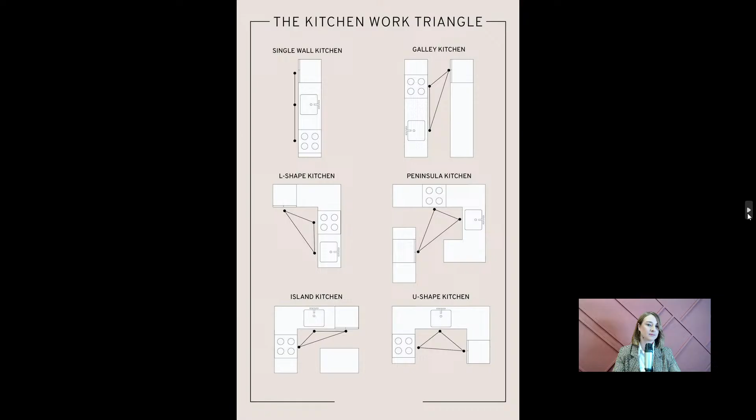Blueprints give you exact measurements and a clear guideline, ensuring that proportions are correct so everything fits perfectly. Layouts are functional, making the space easy and comfortable to use. Your model is true to life and ready to impress clients. So having a blueprint helps you make it like real life. You don't have to guess and try to fit another kitchen in your space, which might not work for your project. So starting with a blueprint is my first recommendation when we talk about kitchens.

When we work in 3ds Max, the blueprint becomes a guide. It ensures we model with accuracy and efficiency. By following a blueprint, you can focus on creative aspects, like choosing materials and lighting, and not worry about whether the basics are good, whether the functionality will work in this project. So that's why today we are starting with a blueprint. I'll show you how to use it to model a stunning, functional, modern kitchen step by step. By the end, you'll see how this simple document can lead to a professional, photorealistic result. Ready? Now let's make some magic happen.

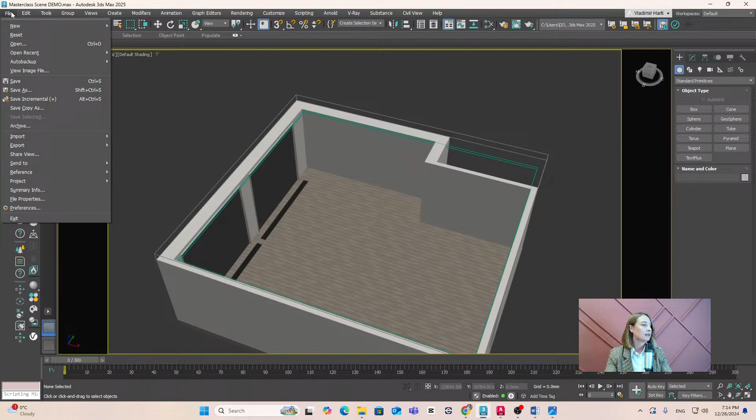For importing an external file, we access the File menu, go to Import, and I will use my prepared DWG file, the blueprint. Go ahead with Open. Here we have some importing options, which are really important. First of all, I make sure I have checked the Rescale option and that the incoming file units fit my units in 3ds Max, so the scale will be 1:1, exactly the same as in real life.

Another thing I pay attention to here is importing the blueprints as one object. I don't need different parts of the blueprint staying apart; I just need this object as a reference, so I will import it as one object. Then I go ahead with the OK button, and I get the same blueprint right here in 3ds Max.

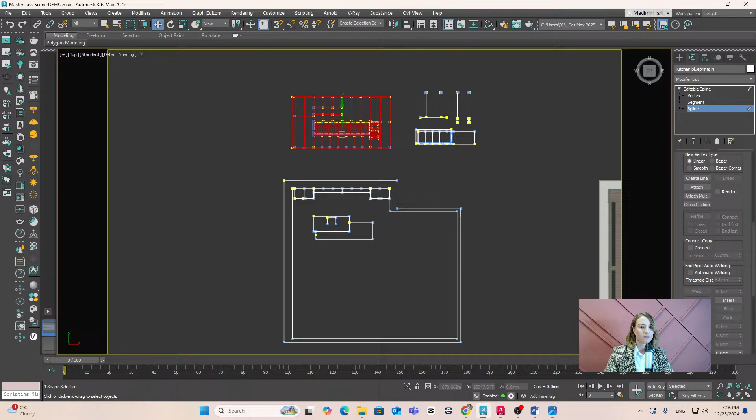You can see it here, but to make sure I have the whole layout I need for the kitchen and the reference blueprints are right in place, I will convert this line to an editable spline and separate the floor plan from each of the frontal views. Working in spline mode, I will select each frontal view separately and detach it to have them separate. Okay, the same with the second one.

Okay, so what I'll do next, I will rotate these two frontal views in vertical position. What will make these blueprints placed vertically right close to my plan. In this way, using a rotate tool, I will rotate it on 90 degrees. To make sure I'm working accurately, I will use angle snap toggle.

Also, because the pivot point was in the center of the entire drawing, I would prefer to center it to this drawing. To make this, I will use hierarchy panel, affect pivot only, and center to object. It will make it easier to control this drawing. So I will rotate it on 90 degrees. The same with the second one.

And what I'll do next, I will move them to fit my plan. Right here. This one is related to island, so I will use it as well. Pay attention that I'm using snaps. Snaps are helping me a lot organizing objects and aligning them to each other so they do not intersect or

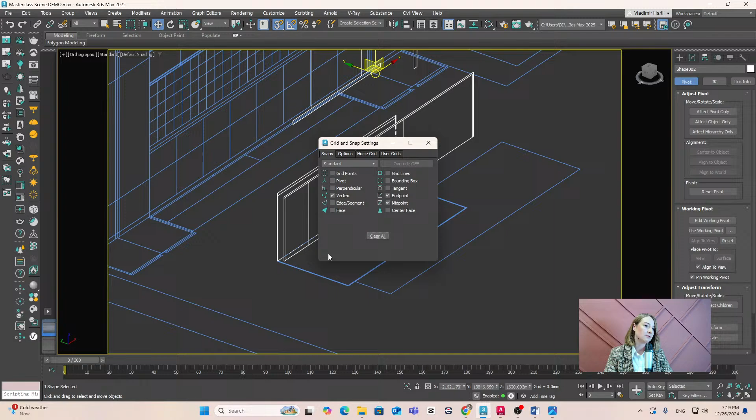they are perfectly aligned. So if you want to see what snaps I'm using, I have almost all the time vertex, endpoint, and midpoint, and others I'm checking just in case when I need them. And one more option, I have checked enable axis constraint, which makes me constrain the movement of objects on certain axes, which makes it work much easier and aligning it perfectly.

So I will constrain it on z-axis now and make sure that this is aligned perfectly on the floor plan. So what I've got now are these drawings aligned this way, which now I will move right to my space. Okay. So here we go. You can see it in here. Yep. I think we are good now.

One more thing I'm trying to do usually is to organize objects on certain layers. So I'm using Layer Explorer. I have already some layers in here, as I've prepared the appliances, some decor, furniture, and lighting options that I will unhide when our kitchen will be ready. So I will make sure that I'm working on a separate layer, or maybe in this case I can use the default one where I have the cameras and I have now the blueprint.

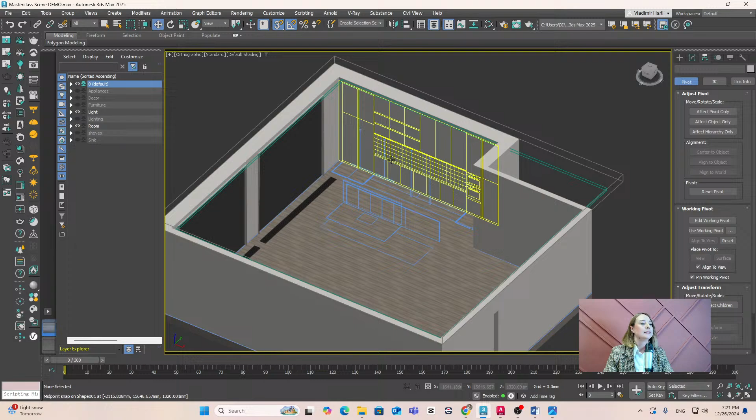So we'll come back to the layers a little bit later, as it is important to have all the objects organized logically in our scene. So next I will select the blueprint. Okay. Isolate them using isolate selection. The hotkeys are Alt plus Q in case you need them.

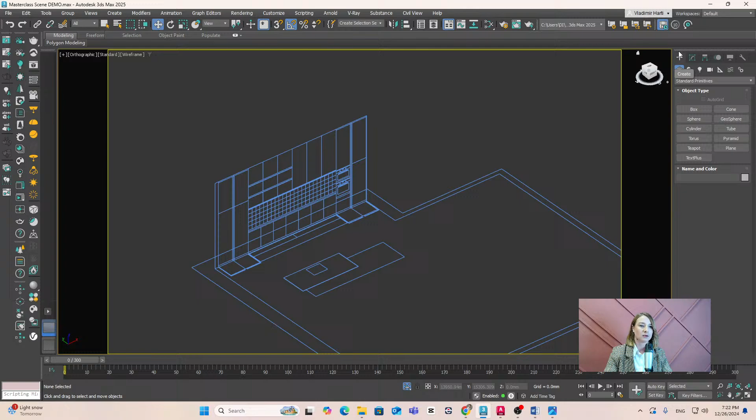Maybe I will keep for now just the back part of the kitchen and the floor plan. I will come back to islands a little bit later. So I will have just these two. And now let's start modeling. Let's see how we can create really quickly and accurately this kitchen. So I will start by working with box as a geometry.

So what I will do first, I will create the cabinets, the lower cabinets of this kitchen from the middle, and I will start by using snap mode over the drawing, which will help me get the exact position of this box and to align it as well. Okay, here we go. Next, I will convert it to editable poly.

So I'm trying usually to focus more on what we really see in the visualizations. So I'm not working too much in the interior of the kitchen, so I will not make all the shelves or all the stuff inside, behind the fronts, but instead I will be working more detailed on what we see in the front and making the details more realistic where they are visible. This makes the scene not that complex, easier to work, and in this way we can try to make it work better.

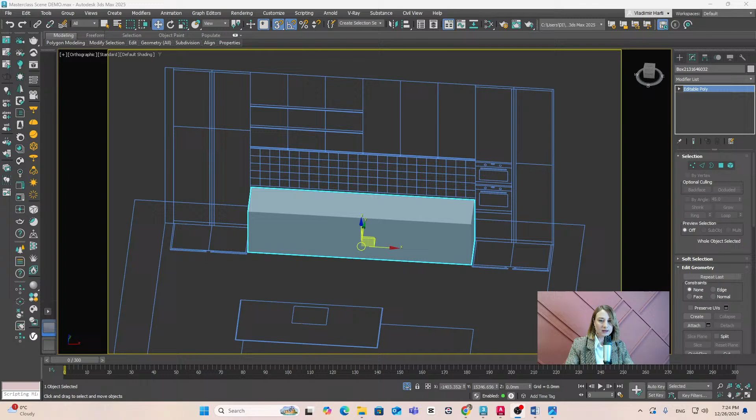Okay, next, after I've converted it to editable poly, I will make a few changes, and first will be this part. I will move it a little bit inside, as usually in the bottom of the kitchen cabinet we have that part that is a little bit behind, which makes it comfortable to place our feet behind.

So I will move it on a certain distance, so I will use right click on move button, and in relative coordinates I will give the distance I need on the y-axis. So in my case it will be about 50 millimeters. Okay. I will come back to that. Now I will go on with the next box that will fit right in here. It will be the part that will be a little bit coming in front.

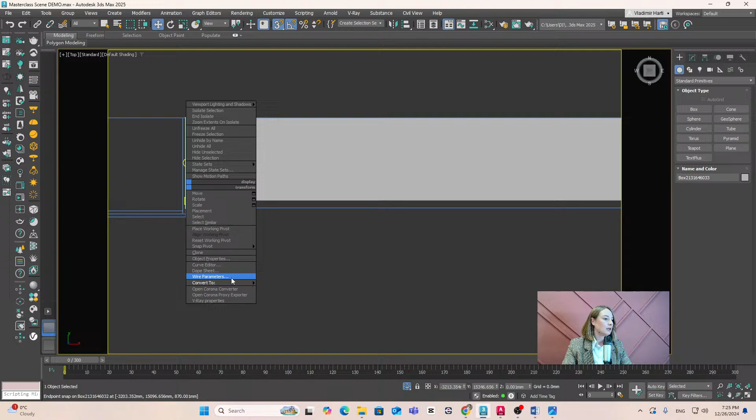This will help us see the construction, the main elements of the kitchen. So converting it to editable poly. If I want to have it in the same editable poly, I can just activate element mode and copy it on the other end. So I will use Ctrl plus Shift and drag on the needed axis, which will make me a copy of this element. Okay, just placing it in the right place.

Okay, next I will move on to front view, where I have the front I need in here. So in this case, for quick modeling the front, I will use a plane and I will make it fit right in here and add the number of segments I need to fit exactly with my blueprint. So let me move it in front to show you what I've got in here. So here you go. And now I think I have here some special actions that will help you save a lot of time while creating fronts in 3ds Max.

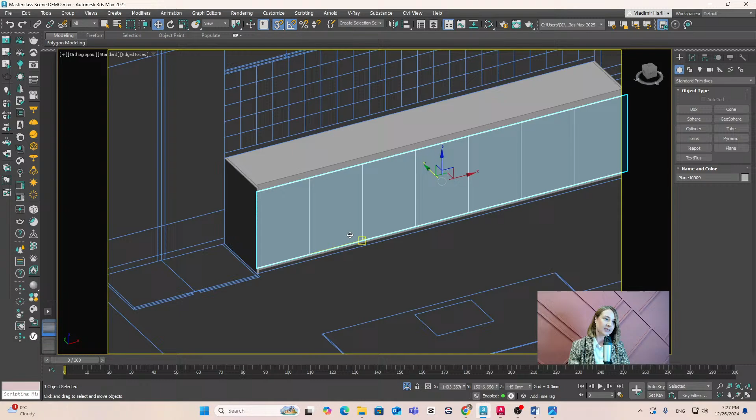So what I will do in here, I will convert this plane to editable poly. I will select all the polygons inside editable poly. Ctrl A helps you select all of them. And you know that fronts usually look more realistic when you have the rounded edges, when you have the needed gapping between them. So what we'll do now, we'll add that specific gapping around each front, so it will look great and we'll get it really fast.

So what we'll use here will be inset. I will use settings to make sure it will work good for me. So inset settings. I will use the amount I need for gapping. It will be about 2 millimeters on each side. And as we have multiple polygons now selected, we'll get these 2 millimeters around the entire selection. What we need in this case is using by polygon and getting the same gapping, the same inset for each polygon I have selected. I will check OK to place it with these settings.

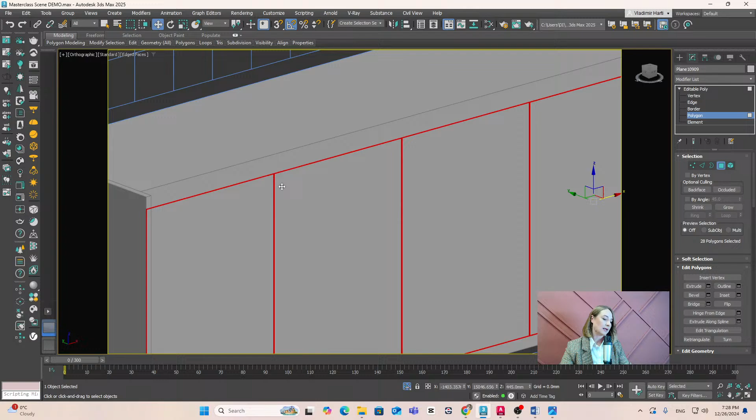And now what I need is just to inverse selection using Ctrl plus I and delete these polygons, which will make the needed gapping available now on our front. Of course, we won't leave these fronts so thin. We need to add some thickness to these polygons. A faster way to do it is using the shell modifier, and to control whether we want to add this thickness inside or outside. In my case, it will be outer amount. I will make it 20. Here, make sure you have auto smooth edge unchecked and straighten corners as well.

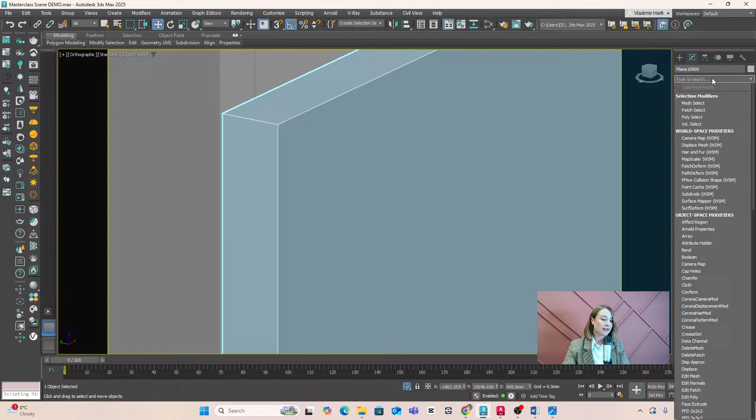And for getting nicer edges, which should be somehow rounded, as we never have fronts with sharp edges, I will convert it again to editable poly and apply one more modifier, which is called chamfer. I don't know if you ever used this, but I think it's a genius modifier. It applies a faster result. So I will just go ahead and change the amount, the radius I need for the edges. It will apply to all simultaneously. So I will use a 1 millimeter radius. I will make 3 segments in here.

And one more thing I set up in here is smoothness. I don't like having smoothness on the entire polygon, which gives some unwanted shadows, so I use smooth chamfer only. Change this and it will have a big impact. Okay, here we are with the front. Now we need to do something with this space and add the handle.

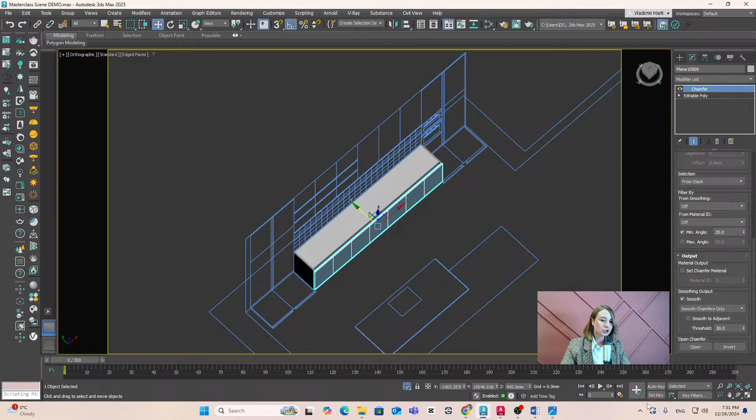I think I will add a hidden handle for the entire length of this cabinet. I will show you an example of what I'm thinking about. It will be an L-shaped handle, which will be right behind the front, which will make it look much better. So in this case, I will be using a simple line from top view, and to make sure I'm drawing a straight line that has no deviation in the Z direction, I will use snapping in 2.5 mode, which allows me to use snaps wherever I need, but will keep my drawing planar. It will be just in 2 directions, x and y. So I will draw this line in here.

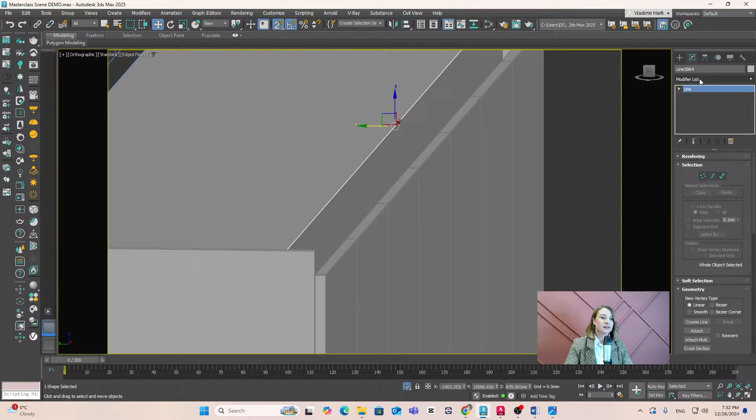Next, I will move this line somewhere above, I think over here, and you can see it in here. Let me show you. So this is my line, and next I will use another modifier called sweep. I'm curious if you ever used sweep and in which cases you have used it. So I will have the sweep modifier, and we'll have to do some changes in here. First of all, I use the angle built-in section. Next, I will control the length, the thickness and the width. So for the length, I will use about 60 millimeters. I will check later if it's good or not.

To make sure all this profile is aligned on down and on left, I will use the pivot alignment and choose the right position I need for this profile. So I will use the left top corner, which will completely move my shape into the right position.

Next, I have to make sure I have the needed length. Maybe I'll make it not that deep, move it a bit forward. I'll use about 20 millimeters here, and the thickness will be about 6. Okay, then I'll do it 30, to make sure I have enough space for the fingers when we try to open the door.

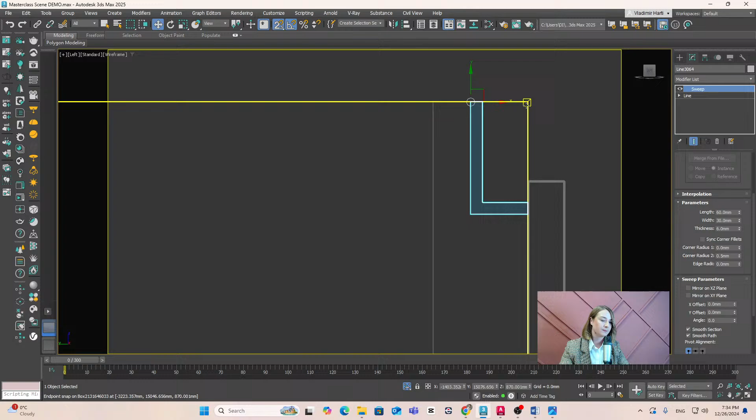So what we've got here is an L-type profile right behind the front, all across the cabinet. Next, I will add some refinements, adding the corner radius, maybe 3 millimeters, something in here, and a bit of edge radius.

Here is the front and here is the handle. Now I'll come back to my box, the main cabinet behind the front, and we'll make some changes to fit it over the handle and up to the cabinet.

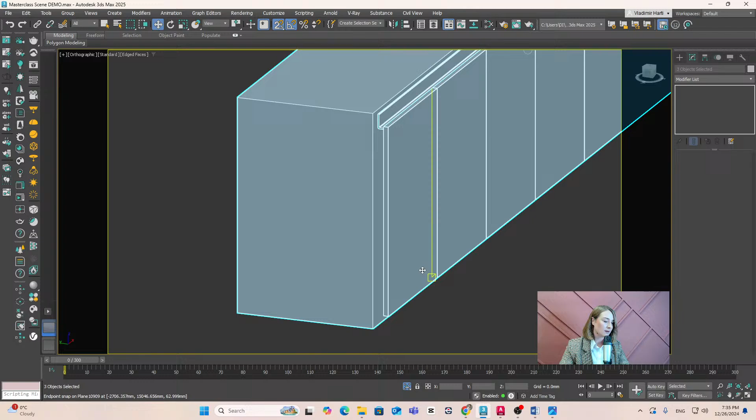I will select these three elements to make sure you see it clearly, so I will isolate them. This box is already converted to editable poly. I will add some SwiftLoops - you can find it in the ribbon, modeling, edit, SwiftLoop - and add some edges, which will let me control better what I need, making sure these are perfectly aligned with the cabinets.

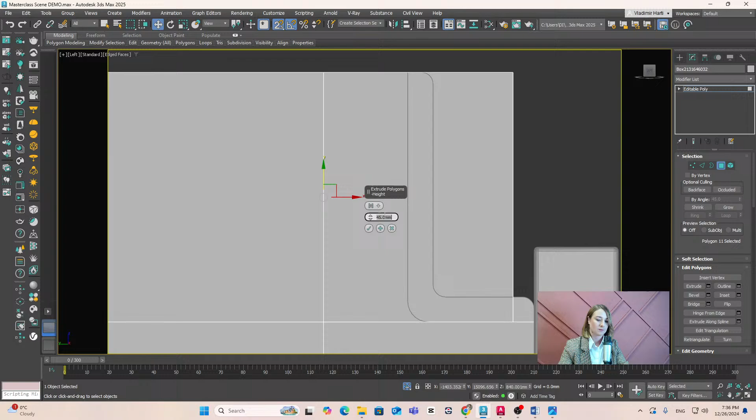What I'll do next is extrude this polygon. Let's see, I think we are good. And this one too. Oh, this one, and once again for this one. But this time a little bit, not that much - it will be about 20. Okay, that's good.

I will have to select again all my objects to isolate them in order to continue working with my kitchen. So now I will attach all the back side of the cabinets into one object. For that I will select any of them, use attach, and add the other one.

As we know all the elements should look better this way, like we used for the front, I will just copy the chamfer modifier I've used here with all the settings already in place - copying with right click, copy. Then I will paste what I've copied onto the cabinets. So I've selected the other ones, right click, paste, to get the same rounded edges. Look how nice it looks right now.

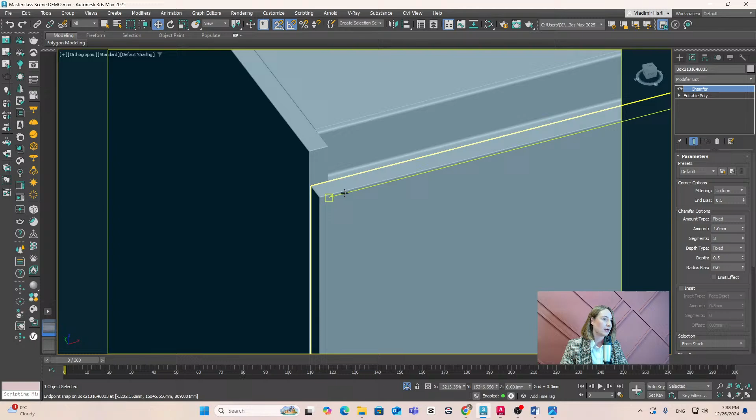We have this box inside, which is usually common for kitchens. We have the fronts, which are all exactly the same dimension, and they are all looking good now. And we have the handle, which is inside - we have that space where we can get our fingers to open the door.

So next, let's go to the countertop. This way I will add one more box which will fit my entire cabinet, making sure I start where I need.

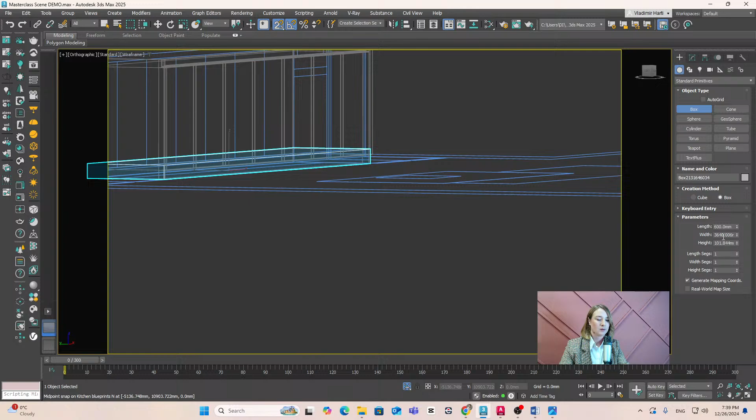I will set up the height I need and move it right on top. I need it to get a bit in front to align right with the cabinet, with the front. So what I'll use here, after converting it to editable poly, I will just move these end vertices to fit my front, and again using right click and paste to apply the same chamfer to it. So here we go.

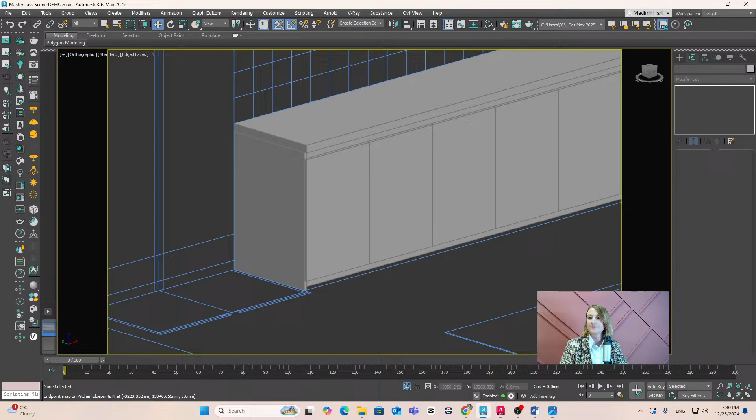So I want to see if you are still here with me. Just want to make sure that you are on the same vibe and everything is clear. Let me know in the chat. I want to continue, but I still want to see that you are here with me. Because next we will move to the other cabinets we have in here.

Okay, I see your comments now. So I will move on.

So for these two cabinets, actually, here is supposed to be the place for the integrated refrigerator. So we'll have the same fronts, and we'll have vertical hidden handles in here, right in the middle.

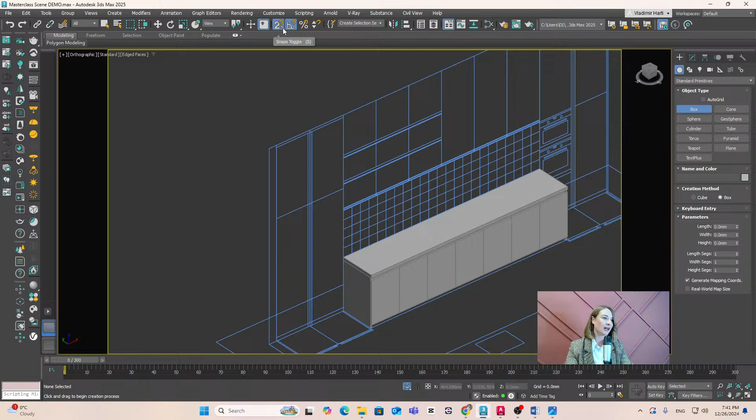Okay, so I will use the same technique, but there will be small differences here. So I will place it, and to make sure I'm working easily on vertical position two, I have to change the snapping mode to 3D. It allows me using the blueprints from the plan as well with the frontal one. Okay, here we go. Next, I will convert this box to editable poly.

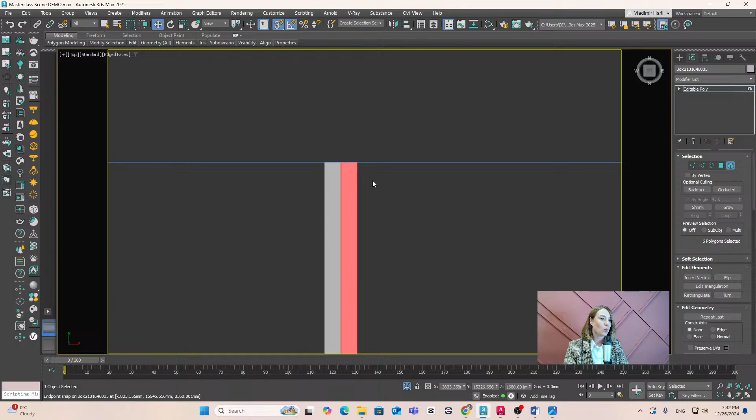So I will do the same here, and one more at the end. This way I'll get the lateral walls of these two cabinets. More than that, I will select these two and make them shorter, just aligning them to this blueprint.

Next, I will add 2 more boxes to fill in this space. Again, I do not pay too much attention to the interior. It can be sometimes if I have open shelves, or niches that are opened and directly visible. If they are not, I use a box like this or even nothing. It depends on the situation. So next, I will make a copy of it in the next place.

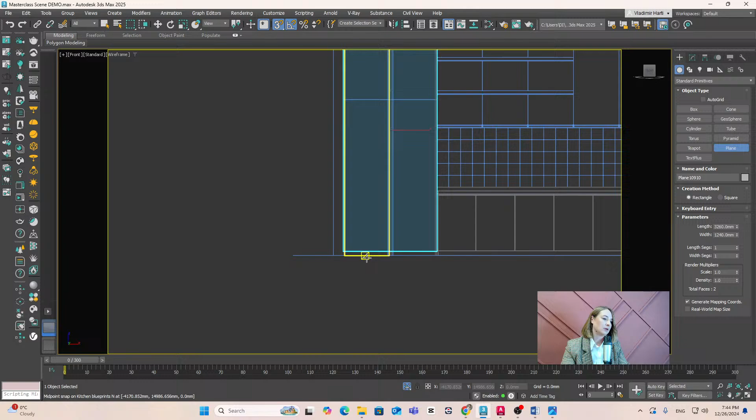Let's move off to the front. For the front, I'll do the same, using the same technique. I will create a plane. This plane I won't divide in segments, so I will leave it as one polygon for now.

Convert it to editable poly, and to get the necessary fronts, I will add swift loops inside the editable poly to make sure I get the right separate fronts. This way I align them to make them fit exactly to the blueprint.

Let's move it up front. Here it is. Now, in the middle we'll have vertical hidden handles, so I will delete these polygons. And now I will select all of them, using the same technique.

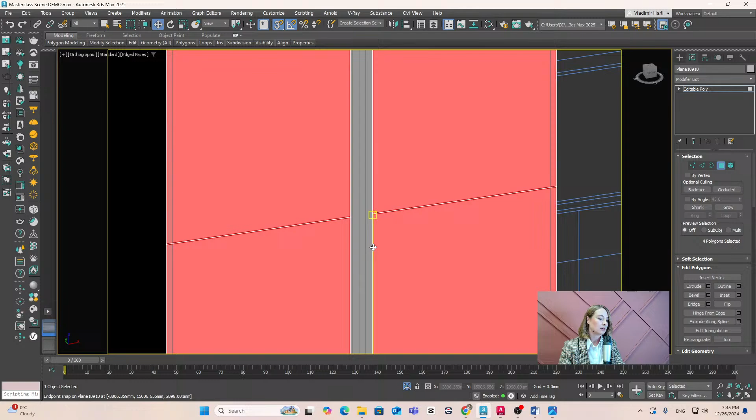Inset settings - use the same gapping with 2 millimeters, and use by polygon to have this gapping around each front. Control plus I to invert selection again, and delete those polygons.

Now to add thickness, I will use the shell modifier again. 3ds Max remembers the last setting, so once you've used it and set it up, the second time it brings you the same settings, making it much easier to work with. Next, with right click, I will paste the same chamfer, but before that I prefer to convert it to editable poly. I usually recommend converting to editable poly at the end of everything you've modeled, as it will make the model easier and won't need too much memory on your computer.

So we'll come back to it later. Okay, here are the fronts. Let me show you.

Next, I will fill this space here with another back polygon and copy it to the opposite side.

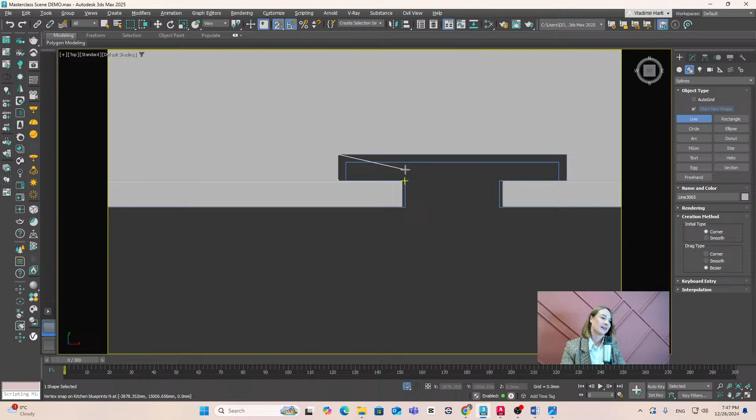Now we have to do these handles, and maybe I will show you another way. It can work as well as the one with the sweep we've done previously. In this case, I will use splines. I will create a line which will fit, making sure I'm working with 2.5D snapping. Otherwise, one vertex can be on the bottom of the cabinet, the other one on the top, so it won't work well. So I've got this line.

Next, I will extrude it using the extrude modifier, which will make it fill the entire height. Let's go with - I don't remember for sure what is the exact amount, but I will figure it out right now. Okay, I think it will be 16 here.

And to get the same thickness we need for this handle, I will convert it to editable poly - works better - and go with shell to give thickness to this handle. So here we go, let me show you. Again, convert it to editable poly - sorry, not mesh, poly, it's more professional using poly. Okay, and then we can place the same chamfer to get the rounded edges.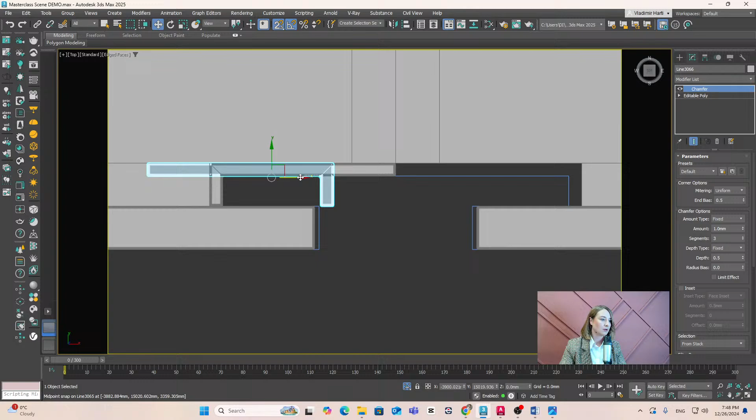Next, I will mirror it on the X axis, making a copy, and just place it right here. So here we have this side modeled too.

For the right side, I will make a copy of this one, as we have almost the same cabinets, just needing to add some place for the oven and microwave, and move a little bit the height position of the front. So I will select all these elements and create a copy using Shift plus Move on the XY axis.

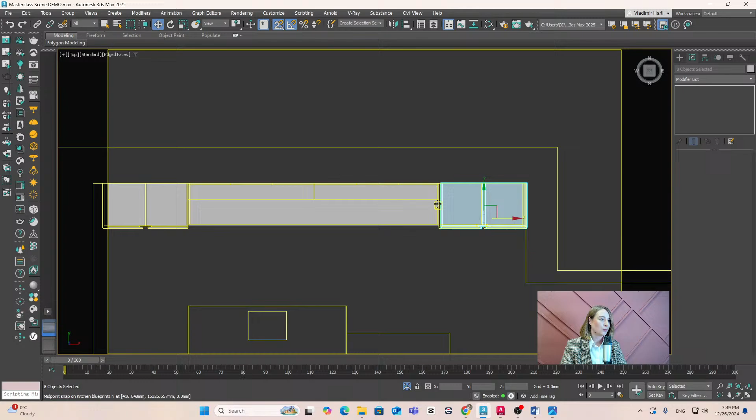Don't make it an instance if you don't need them to be exactly the same. If you do that, you will get the same changes on the original, so you won't need them - in this situation, of course. Maybe in others it should work. So I'm going to front view.

I will go back to editable poly and select this front, aligning them to the position in the blueprint. In this side, I need to move to change the height of this front to fit my appliances position. So I will select the top of this front and just move it down in here.

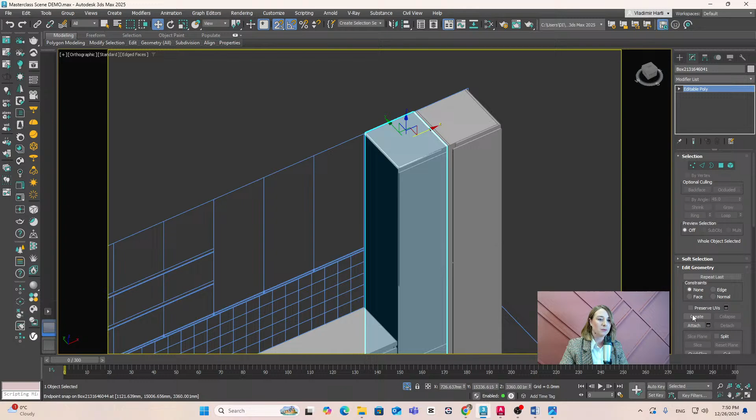Next, I will do the same with these two, but I need them to be converted to editable poly, and maybe attach them as a whole. It will make the process easier and faster. There are no wrong ways if you get the right result, but usually what makes the difference is the time you spend achieving the needed result. So sometimes it's better to just choose the quicker method that makes you create your models.

I need my oven and my microwave here, so I will open the layer toggle to bring them in. I will turn on the appliances layer. I've prepared it previously to make sure I have them here, so I will use them just to make sure I align the objects and elements of the cabinets with the appliances.

Okay, I will make a copy of it right in above. Oh, not this way, I've got too many things selected. So in this way I will use the y-axis with shift, align them perfectly above, and make sure that the bottom sides will fit my appliance.

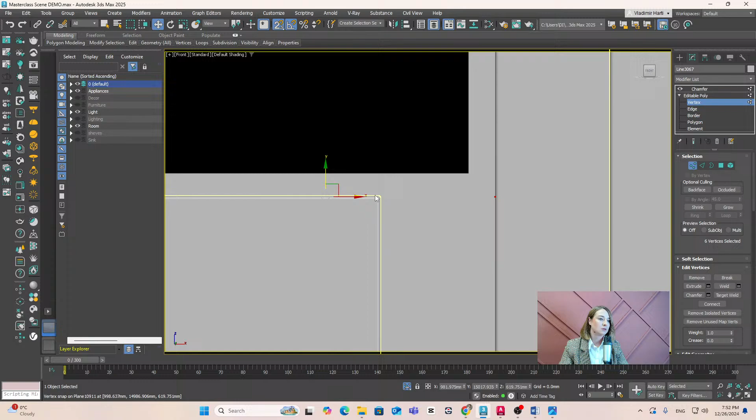One more problem here is the hidden handle that should be interrupted right where I have the appliances. So I will use vertices to shorten the handle here, and next I will go with Control Shift Copy - sorry, not that much, just the handle, just Shift and copy, and extend it to the top. Okay, here we've got that too, you can see it in here.

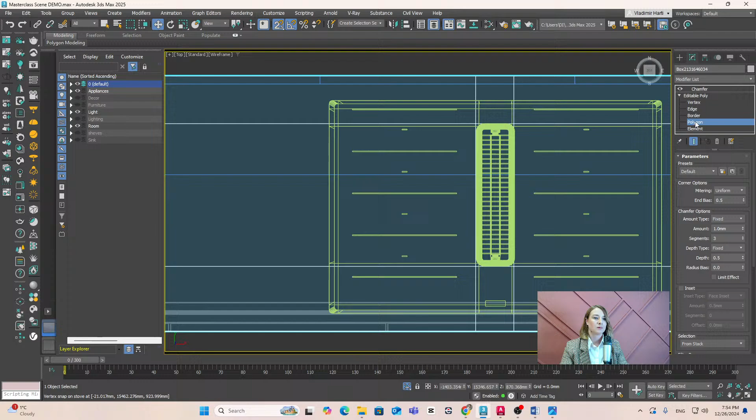Next, we have here also a stove that needs a gap, a hole, because it needs an element to be cut in this place. So what I'll be using is the same SwiftLoop around that place, and then using polygon mode, I will use the top and bottom polygon here and bridge them to create a hole in this countertop. You can see it here, yeah?

Great, okay, we'll move on to the - not that much, I need my objects back. Okay, so now we'll go ahead with the top panels. Here we'll do them really quickly using the plane, the same technique we've used for the front, for the cabinets, yeah.

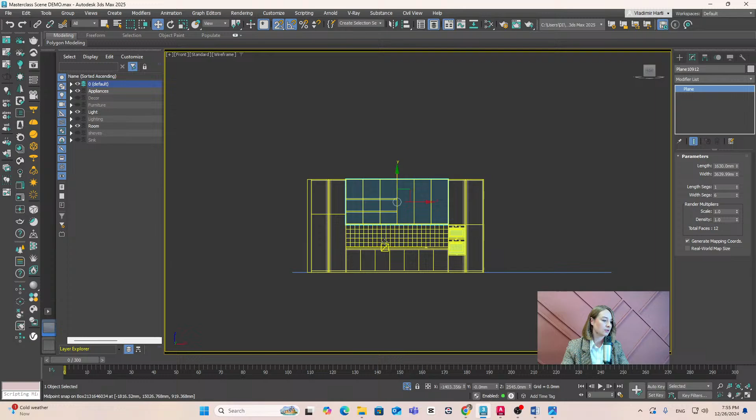So I will add the necessary vertical segments you see here, and move it right where I need it on the wall, convert it to editable poly, select polygon mode, Ctrl A, then inset settings, the same 2 millimeters by polygon. Okay, Ctrl E, delete - I'll make it faster to not spend too much time on what I've already explained.

So now going ahead with the shell modifier. Let me see, the thickness is in the right direction, yes, but I need it 20. And again with chamfer. We'll have here some shelves that I've prepared, and I will activate them a little bit later.

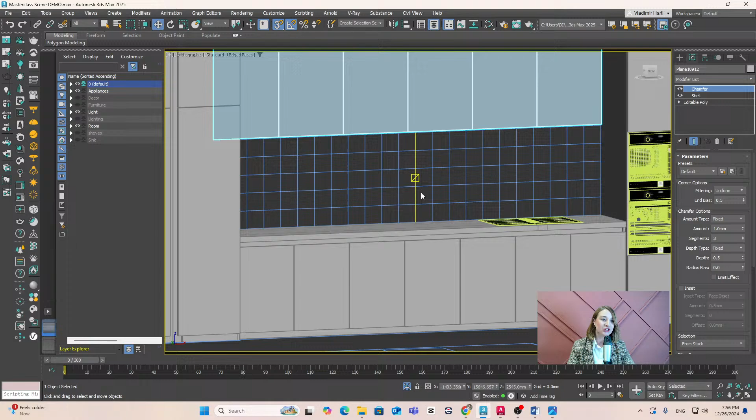And now let's move on to our backsplash. In this case, we have an unusual backsplash, as it will be created by lighting boxes. So it will be interesting, not just modeling them, but also creating the material to look realistic in this case. So we'll move on to front view.

Again, starting with a plane, I will create the needed segmentation to fit my blueprint. It will be around 23 on width and 5 on height in my situation. So if you want to see it, I will move it a bit forward. Okay, here you go, it fits perfectly.

And convert it to editable poly. Select all the polygons, creating a kind of frame around each block. We'll be doing that again with the inset settings by polygon, somewhere around 5 millimeters. Okay, and to get a kind of beveled effect for each tile, each glass block, I will use a bevel setting option from here with the same polygon selected. But before doing that, not to forget, is separating the polygons by IDs, because it will be needed when working with the materials.

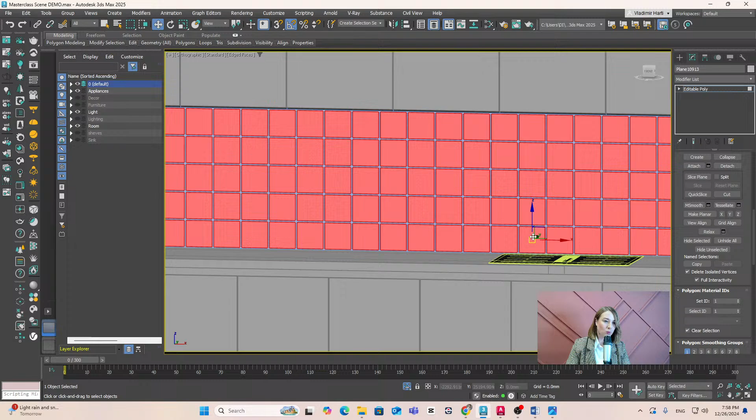So in this way, I will use ID 1 for the main blocks, Ctrl I to select all the others, I mean the framing, so here I will use ID 2. Now I'll come back to the blocks, using a bevel option from here, bevel settings, I will get my needed profile, the needed aspect. I will go ahead with 5 millimeters for extrude amount and somewhere -15 to get the outline in this way. So here we go, we've got the blocks.

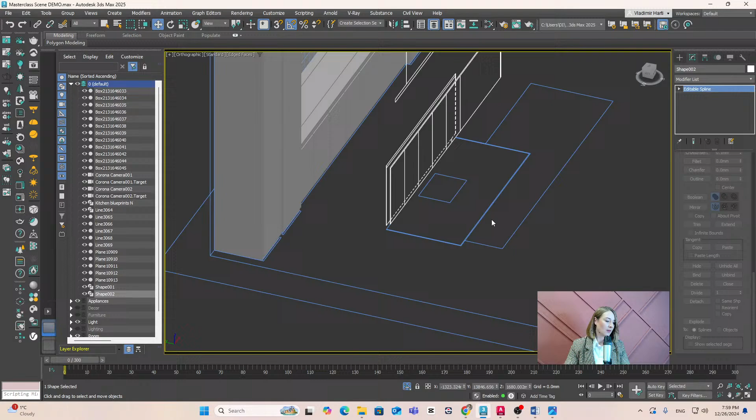Okay, next we'll move to the island. I will activate the blueprint for my island. Here I will use a box for the main island. Let me open the render maybe to show you, for instance.

Okay, so we'll have here this island that has a kind of fence around, and here is the main dining place, turning into a dining table. So we have these two separate elements that we will create one by one. Okay, so in this case, I'm starting with the main island, and here what I need is to convert it to editable poly.

I will keep just the needed objects because the main kitchen is somehow ready. So I will isolate the main objects I need: the floor plan, the island blueprint, and the box I started to model. It can be seen from here, it's an effect of a floating island.

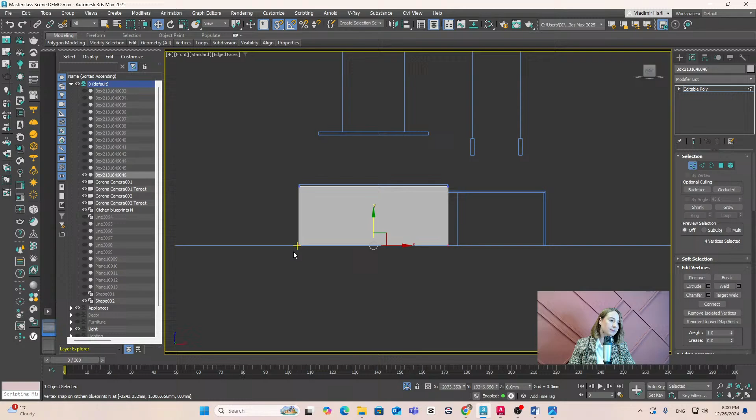So that's why I will move the bottom polygon a little bit higher. I have it from the blueprint. I will align it from the front here.

Okay, and to get the main element, which is the base of the island, I will select the polygon on the bottom, and I will use an inset of 130 here and extrude to get this element a little bit inside. Let me make sure I'm aligned with the blueprint. So here I am.

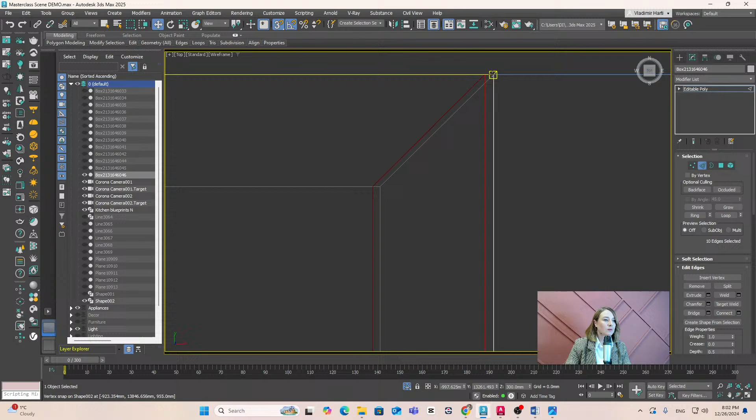Next I need to add some details to this island to make it look better. So I will add some swift loops to get the elements I have here. To align them at exactly the distance I need, I will use edge mode. Okay, it was deselected. I will align it with my blueprint. The same here, and one more here. It will be on the y-axis. Okay.

Now I will select the polygons I've got here and extrude them to get that limitation of the island. I'll use an extrude somewhere around 30. Now it's a little bit higher, so I will use alignment with the blueprint. So here I got it.

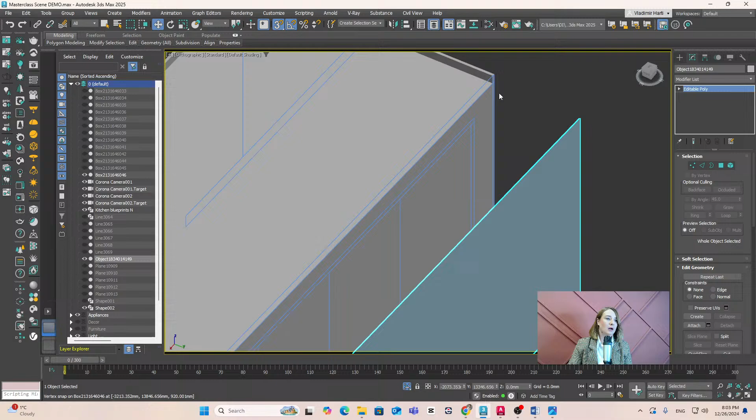For the front, again, I will create a copy of this polygon, Ctrl+Shift+move. I will create a separate object, so I will check clone to object. Next, I will add some detailing here too. Selecting, not this one, this one, I will select this element and extrude them too. Extrude over 20. It's okay.

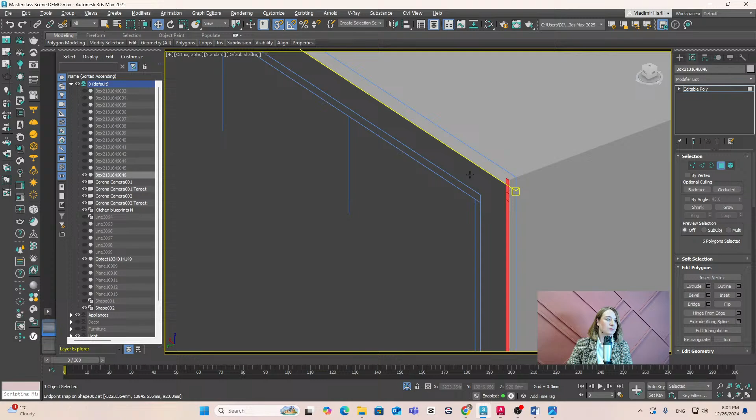Also, I'll add one more swift loop. Okay. And it will be here. 20 from above. It will be somehow the effect of a countertop that comes in front, so extruding it in the same way will help achieve this result. Now coming back to our fronts at the island, I will align it inside, right here.

Move these vertices so they don't cover the countertop, so it will be somewhere around minus 40. Let me see. A bit more.

Okay. And to add the needed segments that will divide my front for this island, I will use edge mode, selecting two opposite edges, and use connect settings, where I will add the necessary amount of divisions or segments. They will be exactly at equal distance from each other.

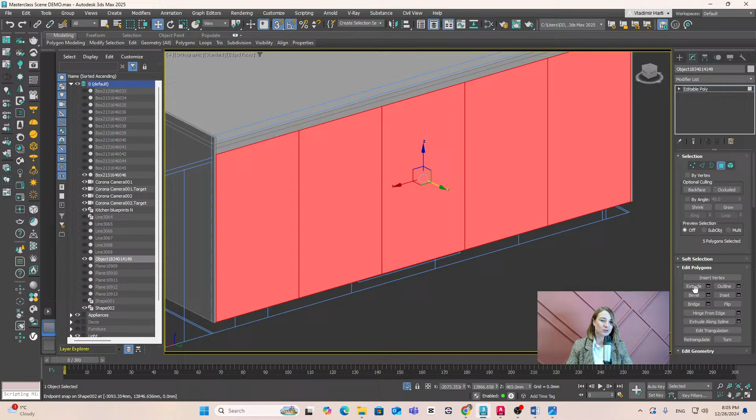You already know the technique I'm using, so I will select all the polygons, inset settings, by polygon, 2 millimeters for gapping. Control I to inverse, delete to erase them. Again, shell, and again paste for chamfering. I need to move them in place. Okay, let me see. Great. So here we go. We've got the front too.

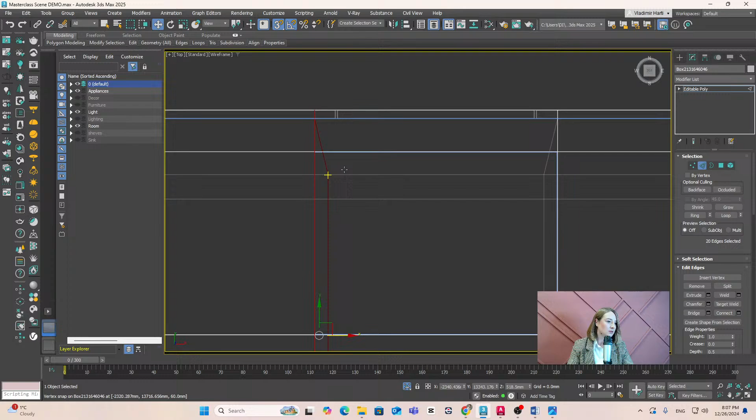What we need more here will be the sink right in the island. I can now activate it, so you can see it here. But I need to add the necessary swift loops to create the hole here. So I will use swift looping. Actually I have the lines on my blueprint, so I will deactivate it for now. It will make it easier to perfectly align these edges, these segments. Okay.

To select the entire loop, always use double click. It makes it quicker, in case you didn't use it previously. This way.

Okay. Here we go. Now, adding these loops, we've got this polygon that we easily can extrude inside with minus. Let's give it minus 2050. Let's see if it fits for the sink. Great. So here we go.

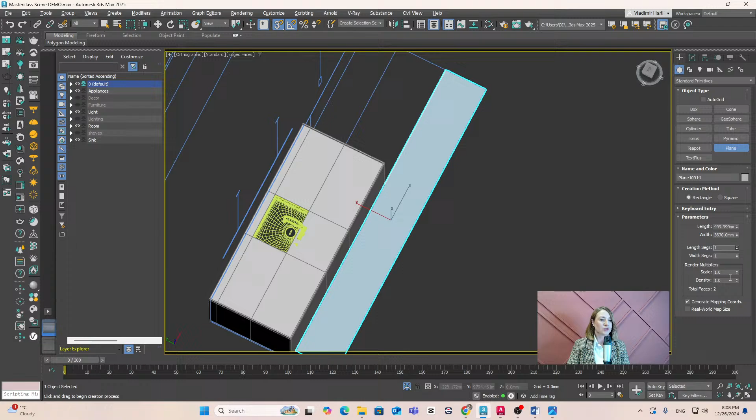And the last element we have in here is the table. I'll start with a plane. I don't need the segmentation, I will get rid of them. Next, I will move it right on the needed height. Then from the top, converting it to editable poly, I will add a swift loop to align it with the island.

Here we go. Next, to have this edge converted to a polygon or somehow grown in this direction, I will hold Shift and use Move on the needed axis. Sorry. Okay. Next, I will select the edges from the end, and the same with Shift and drag. I will add these sides.

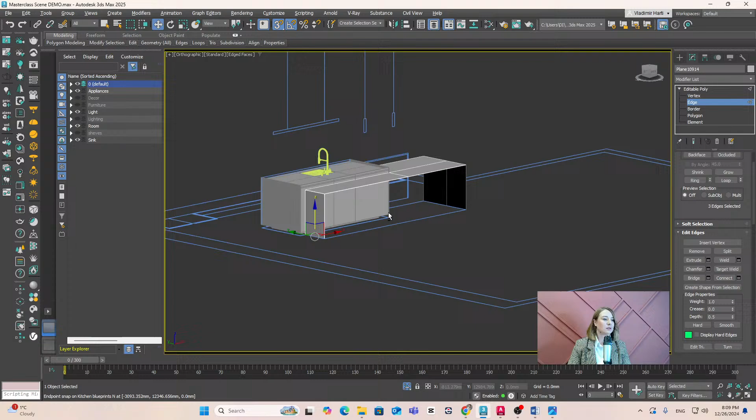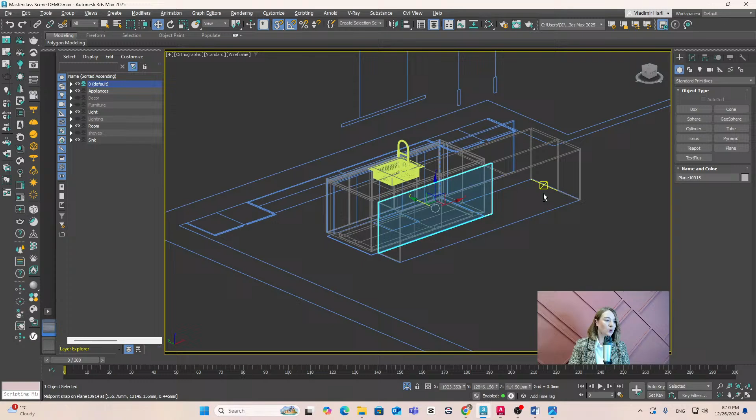Okay, and a few more things in here. We have this table somehow interesting inside. We'll have the same paneling as we had on the back of the kitchen on the wall. So we'll repeat it in here using the needed number of segmentations. Let me check. Okay, here we go. Convert it to editable poly. Select all the polygons, inset, by polygon, 2 millimeters. Okay. Control E, delete.

Shell. This time it will be outer amount. And okay, we'll convert it to editable poly. And I think I will take one of these elements and create a copy, Control Shift drag with move, clone to element. Make some changes in here. You'll see in the next moment why I've done it.

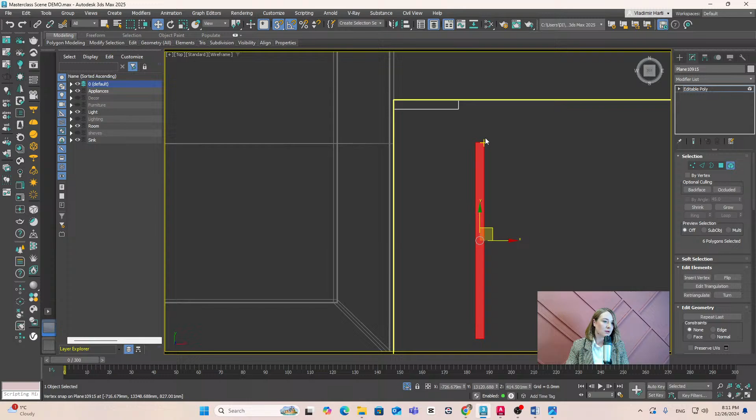And once again, you can also create copies using rotate tool, and you'll get a copy on 90 degrees or whatever you need. Okay, to have the same gapping in here, I will use move at certain distance, and as well aligning the vertices in here. Yep, here you go. We've got this element. So all these will be part of the table, and here we have the island. Okay, let's see what we have done till now.

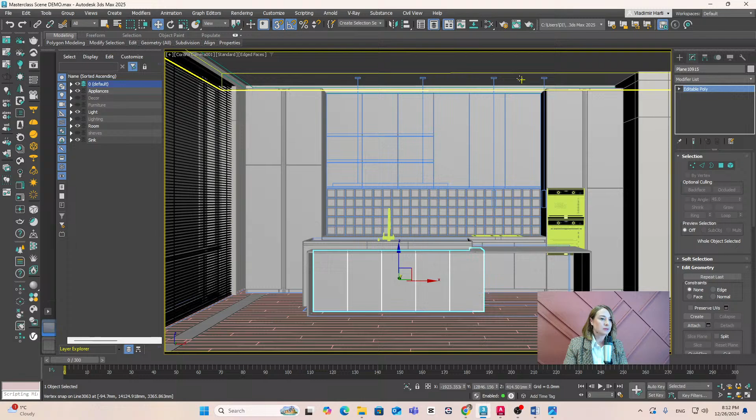I have a camera inside, but before watching what we've done, we need general lighting, and in this project I'm using an HDRI map, so we'll have to go ahead and add the main lighting in order to be able to work with materials and to have the base lighting in here. So for that, I will open material library. I will create, okay, let me see in here. I will use a Corona bitmap to add the HDRI map.

I think I have the backup, yeah. Just a moment, making sure I find my files in here. So I have a previously prepared HDRI map, which I will be adding in here. Okay. I will place it in environment, so we will see this image outside the windows. So almost all the time I am using color correction to make sure we can get the necessary saturation or the brightness we need outside.

So Corona color correction will be the map I will be using before adding it in environment. Next, I will change the saturation, make it not that colorful. I need it desaturated, so somewhere around in here. I will add a bit of brightness, but we'll check it right after we place it in environment. So where do we set this up?

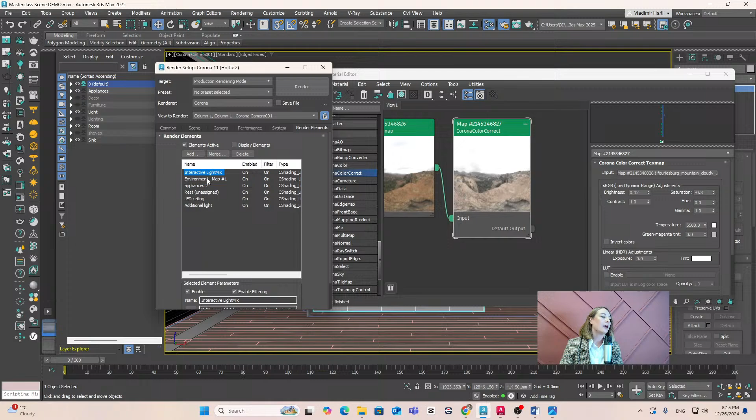Also, I have my scene prepared with render elements, which means that I have light mix already connected, already activated. I have the environment which will be controlled separately. I have some lighting at appliances, it's more about the oven and microwave. Also, I have some LEDs in ceiling. I have a shadow profile in here, and I'll show you the effect we get for the ceiling. And of course, in case I need some more outside lighting, I've prepared 2 additional lights outside the windows. I will show them too in light mix with additional lighting.

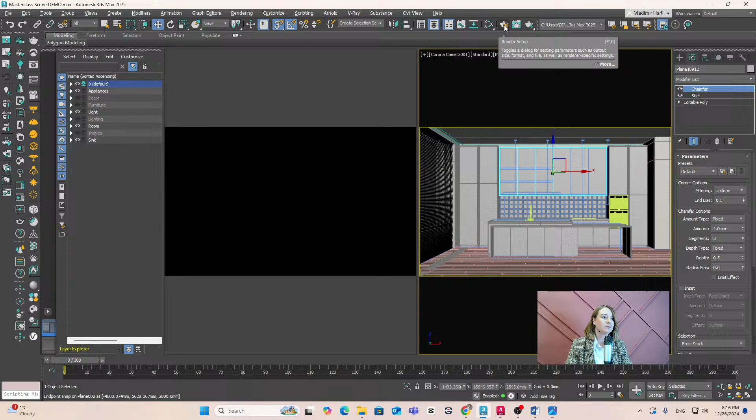Okay, let's see what we have in here for now. I will split my window into wireframes, and I will start interactive rendering right here directly in 3ds Max. Okay. Yeah, here we go. I can see something in here. To make sure I have my interior lighting, I mean the ceiling LEDs I've got in here, I will activate their visibility. Okay, here we go.

If you are interested what I've used in here, I will show you in a few seconds, just to lock this view in order to have my previews relevant and to make sure that I can go back to my scene and work in here. Nope. Once again, I will use in here camera 1, locking it again.

Okay, just a moment. So for the ceiling LED, you can see it all across the room. I've got this LED. It's a Corona light, rectangle light. You can see here that I've changed the temperature, which makes it warmer, about 3,500 Kelvin, and the intensity is usually set up depending on the certain scene.

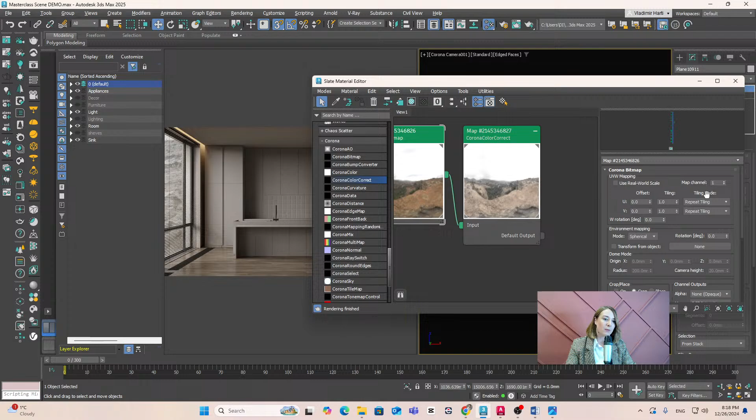Also, I will make sure I get a nicer view outside, so you can see a hill or a kind of mountain outside. Maybe I will change the camera to show you in the other direction what we've got outside the window. Here I will go to the Corona Bitmap where I've loaded the HDRI map, and I will move it a bit lower. Okay, you can see how it goes down. And you can anytime use the rotation angle to get different angles outside. I think it's good this way, 30 degrees. I will keep that.

Okay, I'll go back to my interior. So what I've got in here, once again, the HDRI map outside. I have the Corona light added as LEDs around the ceiling across the entire room. And one more thing that I've added in here are 2 planes which are positioned this way. Why are they here in this case? Let me show you the difference.

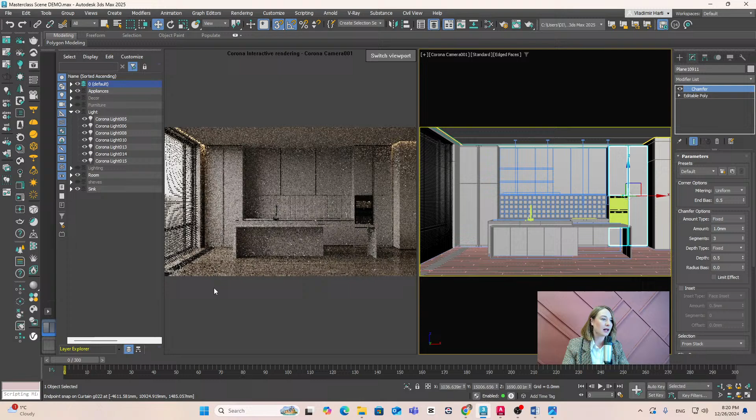I don't want to get overexposed exterior lighting, but in order to have enough lighting inside, I've added two outside lights. Here you go, how it looks without them and how it looks with them. It helps bring a bit more lighting inside. What is important about this is that it has to have the intensity very low. And the second one, we have to uncheck all the visibility options in here to make sure it won't be visible inside our scene.

Okay, does it make sense for you right now? Are you still here with me? Can we go ahead with materials?

I think I'll start this time with the backsplash, which is another dose of lighting, because it's a backsplash with a lighting box effect. So for creating the material for the backsplash, I will go to the Material Editor. Do you remember we've set up two IDs, the main blocks and the framing around? So I will use, in this case, a multi-sub object material, which will help me use two materials on the same object. How does it work? We had the IDs already set up, and in here I will use the same number of materials I will need. In this case, two materials.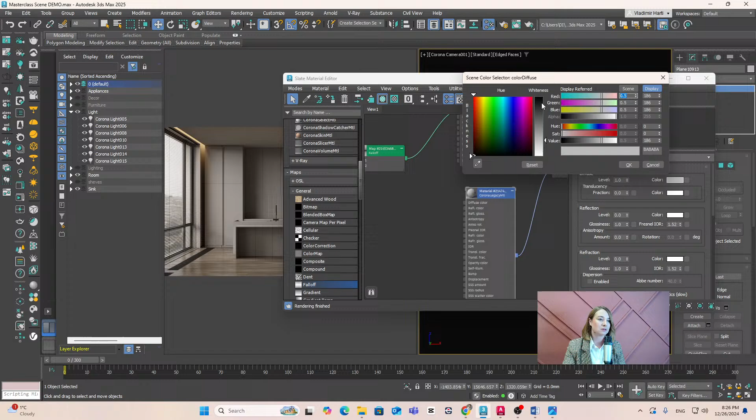Okay, and here we'll have a kind of dark metal. It will be close to black. I will add reflection and decrease the glossiness a bit to have it not so glossy. Okay, let's apply it to the scene. Here we go. We've got that lighting effect in here. Yep.

Maybe we can change the image aspect to vertical to have it on the entire screen. Making it squared, why not? Just to make sure I'm solving the camera position. Okay, I think it will be much better now.

Okay, next, let's see what about the cabinets. We have two materials in here. We'll have the light one for the front, and the black one for the back side, the paneling and the dining table as well. So let's start with the light one. So going into the material library, I will add one more Corona Legacy MTL. Okay, here you go.

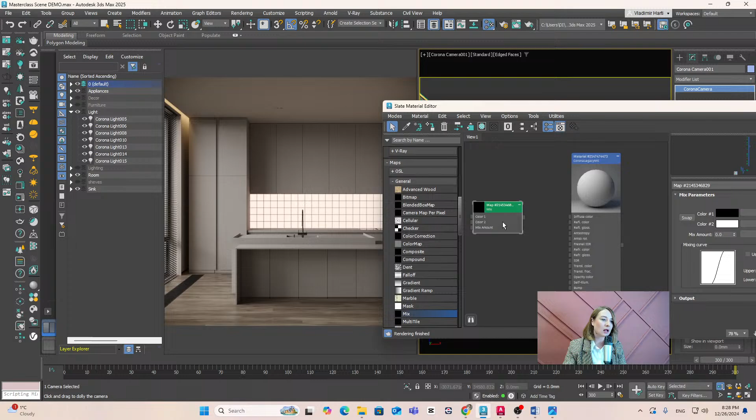And to make it work, I will have to get a more realistic touch. I want to mix two colors to get a more complex effect. So I will use a mix map, where I will set up the two colors I want to mix. So for color one, I will use the color with the numbers 174, 173, 171. Okay, it's a kind of warm gray.

And for the second, I will use something close but a little bit darker. That will be really close to the first one. Okay, maybe I'll make it a bit darker. Yeah, should work better. And for how they will mix, I will add a mask effect using a bitmap in the mix amount. And here I'll use, let me find my maps, it will be right here, the dirt map. It is in here.

Next, for an even better effect, I will use a Corona ambient occlusion. It's similar to the V-Ray dirt map in V-Ray, if you ever used it. It adds imperfections and it's really nice for getting a nice effect. So this mix color, I will connect to unoccluded color. I don't need the edges to be so dark, so I will change the occluded color in here too. So it will be somewhere around 160. Okay.

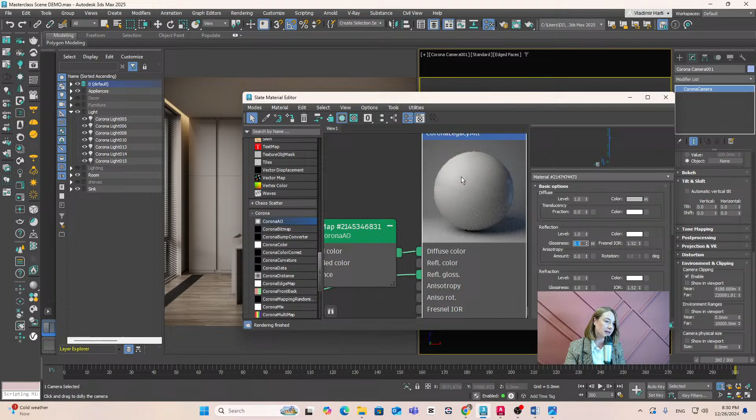And with this effect, you can see some stains, some places where it's more glossy and some places where it's not that glossy, which is obtained with this kind of map. But I will decrease this effect a little bit, so in the reflection glossiness amount in the maps, I will make it not 100% but around 20. Okay, this will be the material for the main fronts. I have them in here, here, and here. Let's assign it.

Of course, we need to add a UVW map in order to have the dirt effect, the imperfections, accurately set up. So I will use box and about 1500 dimension for this one. If you want to see it in the scene, you can anytime use show shaded material in viewport, this button, and you will be able to see how it will be applied in the scene.

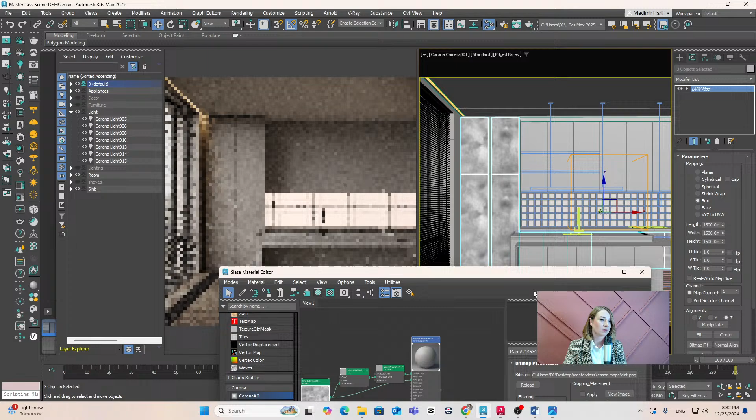Okay. And for the black material, I will create a copy of this one already set up and just change the colors. Shift and drag to create copies. And here we'll have the next changes. So in the mix map, the main color will be somewhere around 59. It will be a dark gray. And here will be around 50, even slightly darker than the previous one.

Again, we'll change the occluded color in the ambient occlusion. 15 here. I think we need a little bit higher in here. Okay, just a moment. Yeah, to have a better difference. And let's see how this will work in here. So we have this, the table, all the back elements.

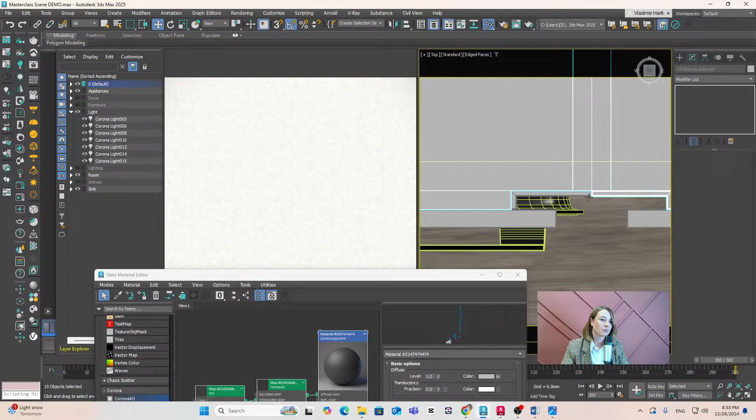Let me quickly select all I need in the scene to be applied. We can even use it for the handles, but we can use a metal effect for the handles. It depends on the effect you want to get. Okay, making sure I didn't miss anything important in here. Okay, applying it.

Yep. Let's see in here. Of course, we need to set up the same UVW map. You can just copy it from here and place it on all the other objects. You'll have it already with the same setup.

Look at these nice reflections in here from the backsplash. Yeah, you can see all this color changing on the table. It's because of the angle, but I can show it in here too. You can see these stains. Yeah, all these imperfections give that unique touch for any interior.

And the last material we'll do today will be a travertine for the island and for the countertop. It's this one we've got in here. So for this one we'll be using a Corona Legacy MTL. Okay. In here I'll use a bitmap, but I'll use it through color correction, so first, at the very beginning, I'm adding a bitmap with the travertine in here.

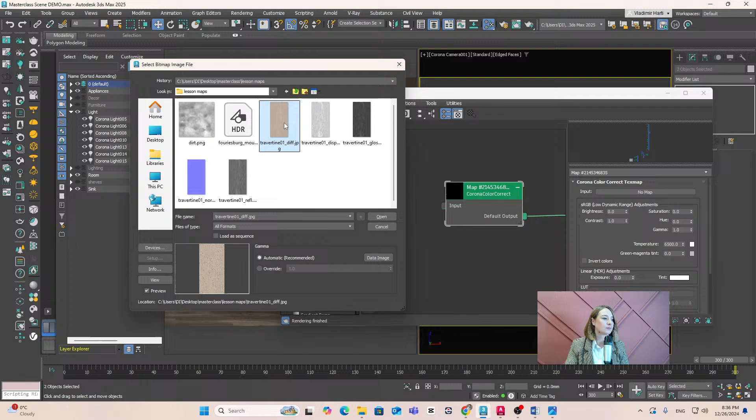So here is the map. I don't want it to be so yellow, so I will use color correction to make it a little bit desaturated. So I will change the saturation to -0.4 maybe. No, it's too much. Less. Like this. Okay, I think it's good.

Here we'll increase the reflection level to 1, then glossiness to 0.7, but we'll need some more additional maps to get that good look for this material. So I have some more maps prepared for reflection color, which will be this one, then for reflection glossiness, this one, and also for bump, which I will add through a normal bump map with the map for normal.

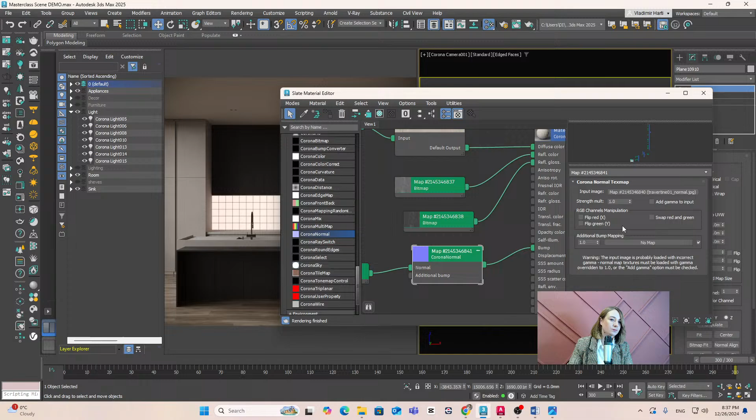Okay, I wanted Corona Normal. I think it will work better for us. Let me find it. Yeah. Okay, and I think I will make some changes in here to make sure we have enough reflections. So for the reflection I will make it 50%. I will make it 30% for reflection glossiness to get a better glossy effect, and bump I will decrease to 0.1, maybe 0.2, depending on the effect we want to get. Okay, let's see what we are getting now.

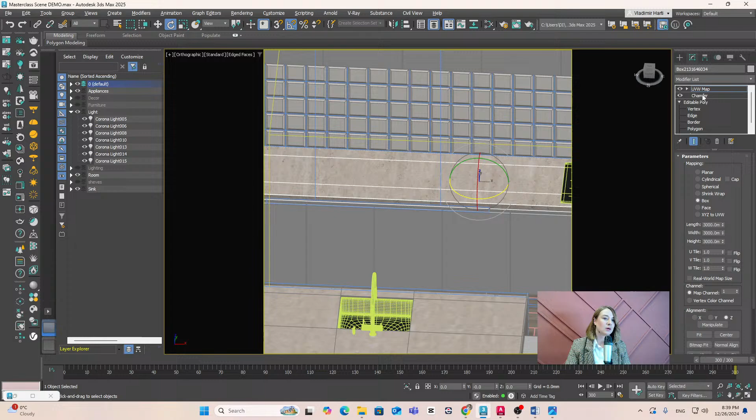I will need to make sure it is applied correctly, so I will need UVW mapping for these two. I know that my image will work well on a length of 3000 millimeters, and also I will change the direction. I think it will be much better on its long way. Yep. I will try to go with the same settings in here, but we'll need to check the direction. In case it won't work, we will change it. I think that's good for now.

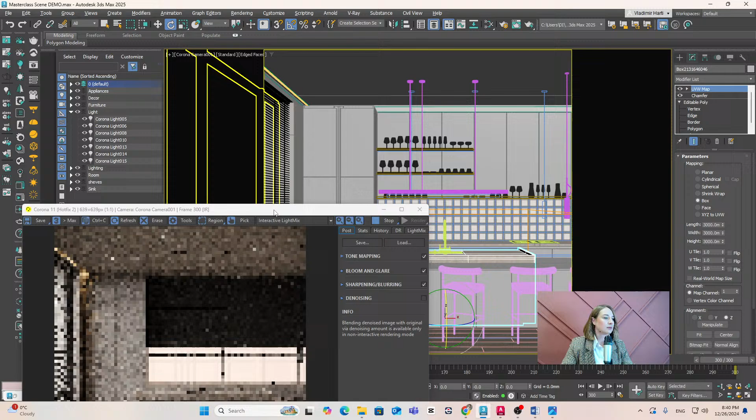Okay, so let me open again. Maybe I'll open it in a separate window. Also, I will activate in here the shelves I have prepared, the lighting elements, decor, and the bar stools. Okay, I will do it full screen. Just change a bit.

Oh, I think I've missed the elements, the black elements behind the doors, the front. Just one moment. Making sure I have all the necessary materials applied. The black one. Make sure it is visible.

Yeah, here you go. Of course, I have some tone mapping prepared in here. I've used simple exposure, I've used some white balance to make it a bit warmer. I've used highlight compression, filmic. Here you've got the highlight compression and rich shadows. I like the effect we got with these post-production elements. The contrast and the LUT, which brings a bit more contrast. If you like that, you can use them whenever you feel you need them.

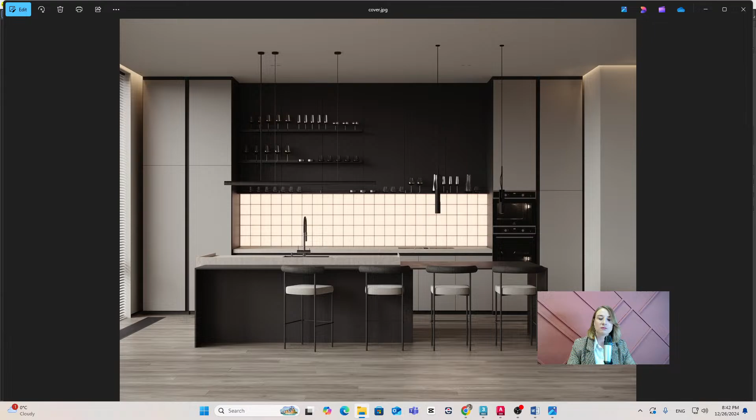So as a result, you can get this final render with all the materials on all the main cabinets modeled by yourself. And it can be adjusted to any kitchen design which you think is good for your project. So I will show you a few more renders I have for this scene. Okay, here you go. I like the shadowing, the lighting effect that we've got in here too.

Some details, yeah. Using depth of field in camera is always a good idea when you want to point out an element in an interior. Yep, and here we go. Here is the scene we've made today.

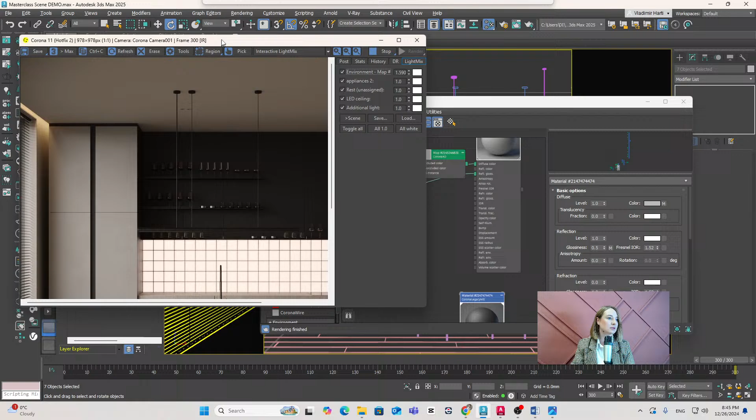HDRI you can always control through simple exposure, so that's the first thing you can do. The second thing is using the light mix, which also gives you the opportunity to control the amount of light you get from the exterior. Simple exposure affects the entire lighting scheme of your interior, or you can control each layer of lighting separately in light mix using environment or any other lights. You can see the ceiling lighting and additional lighting I've shown in this situation - I wanted a bit more daylight effect because my HDRI has more of a cloudy effect without direct sun rays, so additional lighting helps bring more light inside. Everything else you want to get, you can set up from here. Okay, hope I was clear.

All you have to do is add it through a bitmap. I've used Corona bitmap in the material editor, so you can see it right here. Let me show you - Corona bitmap, here is the loaded map. Then I use color correction to get rid of this yellowness, to make it somehow desaturated. Then I've placed it in render setup, scene tab, in scene environment right here. To place a material here, just drag the node from the right, place it in here, and use instance. And here you go, you've got it in your environment.

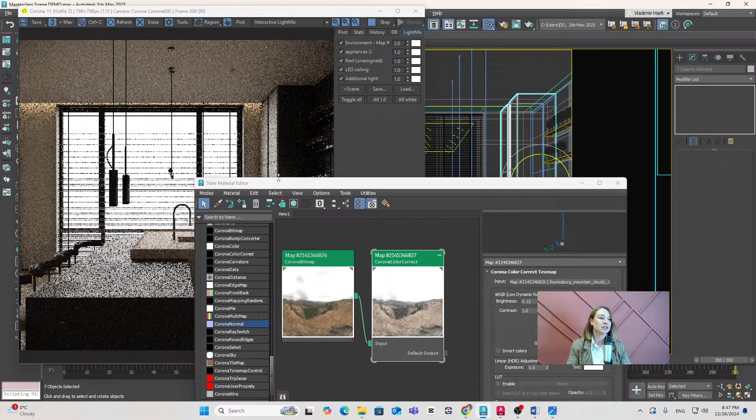Changing the camera perspective will affect the scene because lighting will be different from different points, and that's normal, it's okay to be like that. You'll get a different result when you place the camera opposite the window - you'll have sharper shadows inside, and of course you'll get a different result with a different angle. But you can always adjust it when needed using the simple exposure or each light separately.